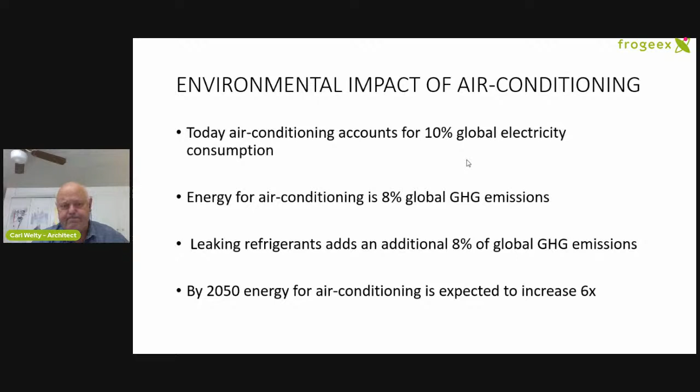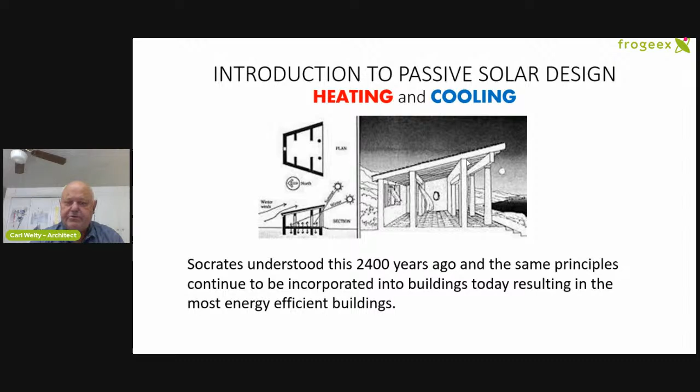Introduction to passive solar. I'm going to do a quick introduction to passive solar, unfortunately little understood, but these principles have been around for a long time—introducing passive solar to both provide heating and cooling. Socrates understood this 2,400 years ago, and the same principles continue to be incorporated into buildings today, resulting in the most energy efficient buildings.

Passive solar, the facts of nature. It's so very simple, but sometimes our culture, we don't do simple very well. The sun rises in the east and sets in the west. The sun is lower in the winter and higher in the summer.

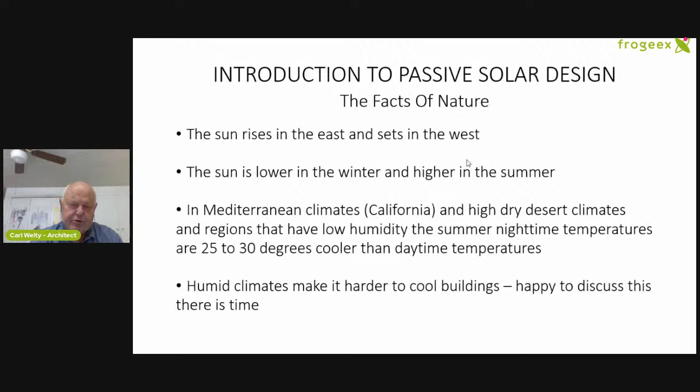In Mediterranean climates like California and high desert climates with low humidity, summer nighttime temperatures are 25 to 30 degrees cooler than daytime temperatures. This is what you can rely on to cool your buildings naturally. In humid climates, it makes it harder to cool buildings. Happy to discuss this another time.

So design principles: orient building to the south. This makes it easier to maximize heat gain in the winter and minimize heat gain in the summer. Use roof overhang or vegetation to shade south-facing glass to minimize summer heat gain. Minimize windows on the east and west-facing walls. Design the building to maximize natural ventilation to cool it at night, and incorporate thermal mass in the building envelope, typically concrete or water bodies.

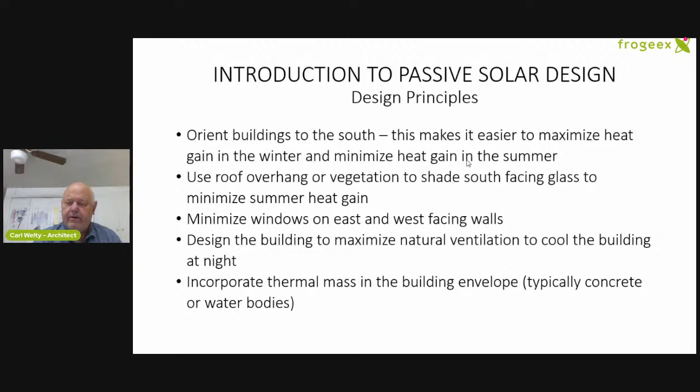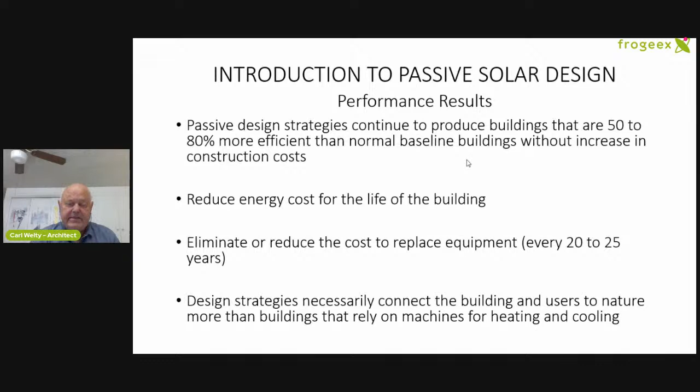Performance results: incorporating these principles continues to produce buildings that are 50 to 80% more efficient than normal baseline buildings, without increasing construction cost. They reduce energy costs for the life of the building, eliminate or reduce the need for cost to replace equipment, and these design strategies connect the building and users to nature more holistically.

I want to discuss a really critical part of this that seems to confuse people. The building envelope requires two parts: there's the insulation that helps keep heat in or out, and thermal mass, often concrete, some sort of substance that absorbs heat and stores it like a battery — a concrete slab or concrete.

Oftentimes people think of thermal mass is the same as insulation, but it's very different and it functions very differently. For example, a concrete wall has very little insulation value. So the California minimal standard for an exterior wall, which is 6 inches wide, would need to be 95 inches thick in concrete to provide the same insulation value.

So concrete's good for thermal mass to store heat, but it does not keep heat inside the building once it's there.

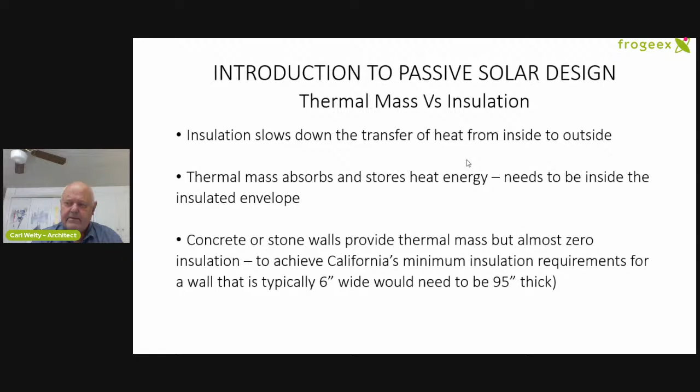So nature-based zero energy air conditioning, summer nighttime passive cooling, relies on the temperature of space being minus 455 degrees Fahrenheit. The space's cold temperature extracts heat from the earth, buildings and air in climates and dry climates.

I know from California that these principles could be incorporated and eliminate the need for air conditioning within 30 to 40 miles of the coast. The same is true for Mediterranean climate and any parts of the globe where nighttime temperatures are cooler than daytime temperatures.

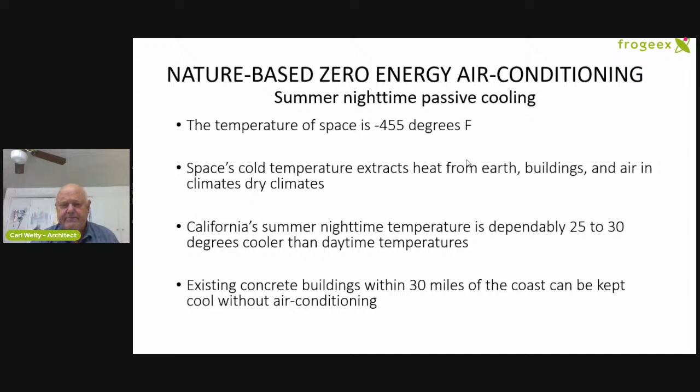Retrofitting existing buildings: incorporating these passive solar principles in existing buildings for cooling is pretty easy because you're not dependent upon solar orientation for cooling. Existing buildings can be retrofitted for passive cooling regardless of the solar orientation.

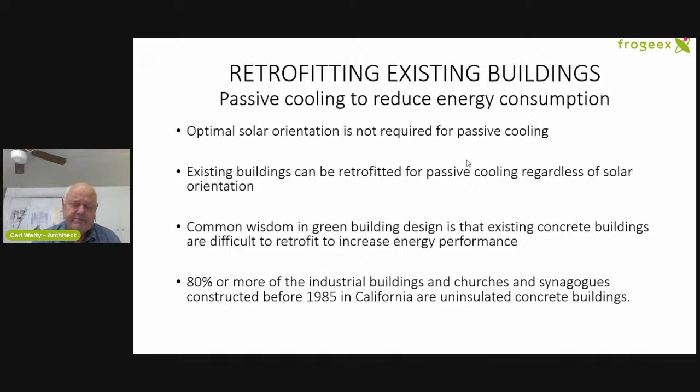I'm motivated by this question, and common wisdom in my green design world in California is that existing concrete buildings are expensive and complicated to make more energy efficient. Also, 80%, most of the buildings built in California before 1985 are uninsulated concrete buildings. So why focus on existing buildings? I like to think that the greenest buildings are the buildings not built. So if we can retrofit existing buildings to be more energy efficient, it's a really net benefit.

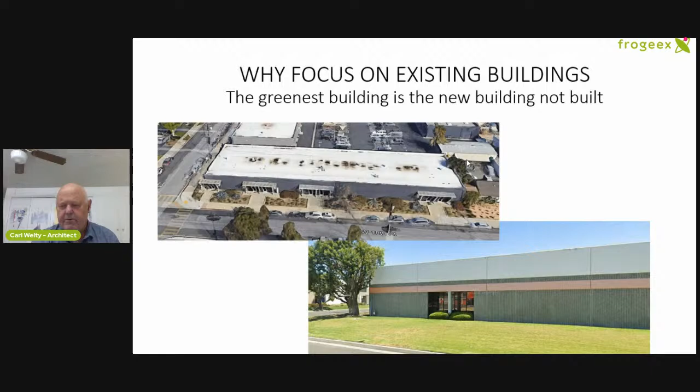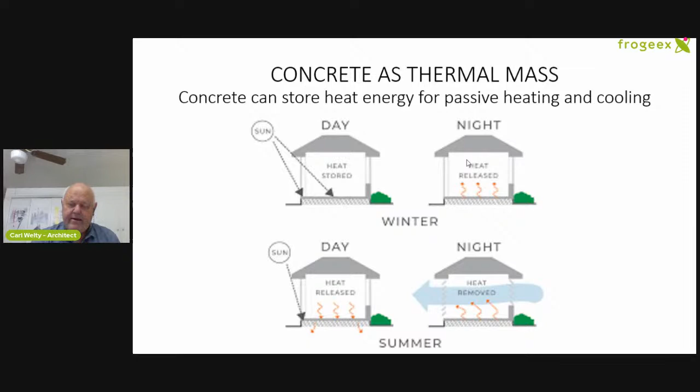So, concrete as thermal mass — I hope this helps understand. Concrete in a passive solar building absorbs heat in the daytime and keeps the space warm at night. And in the summer, the heat is absorbed because it's warm, and it's vacated or radiated out into the night at nighttime.

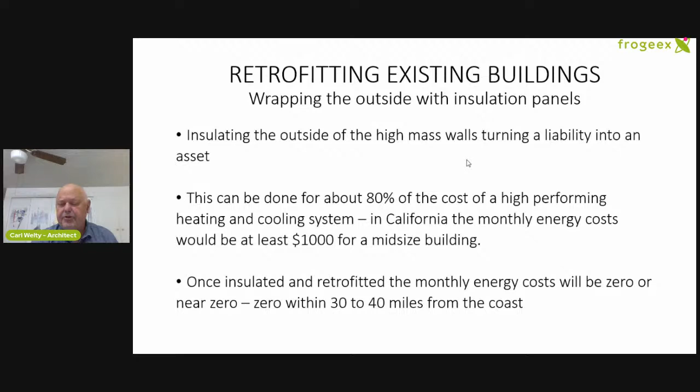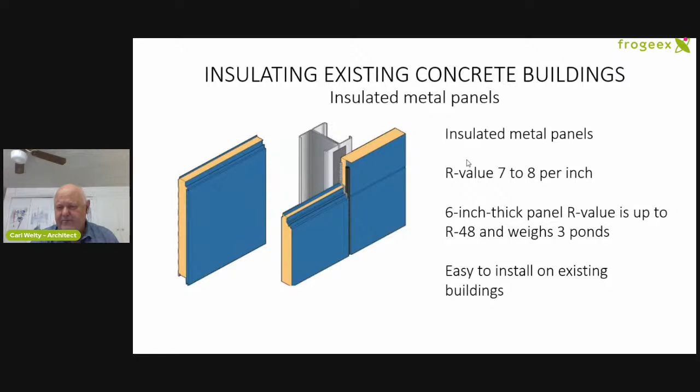We can insulate these concrete buildings with available materials — metal insulated panels, or other easily available building materials. A good R value, we call R value in California, is 7 to 8 per inch. So these can be applied to the outside of walls very easily without increasing the weight and strain on the building.

So these are the toolkits that one needs to retrofit a building.

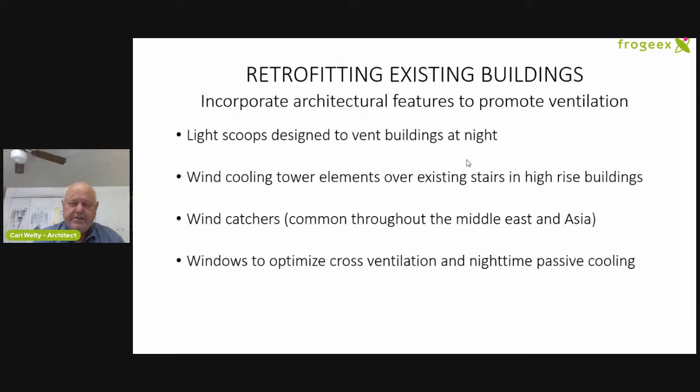Some lessons from ancient history: there's artwork in Egyptian buildings that shows wind catchers and wind ventilation systems that have been around forever.

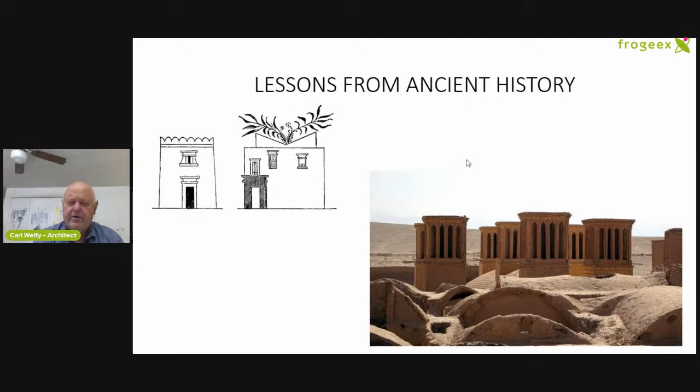One of my favorites are wind cooling towers from ancient Persia. Historically, we know they've been building these for a couple thousand years. The oldest existing towers are 600 to 800 years old and have continued to cool those buildings with no maintenance and no recharging of energy. Wind catchers and big ideas of using wind cooling towers bringing air from the ground.

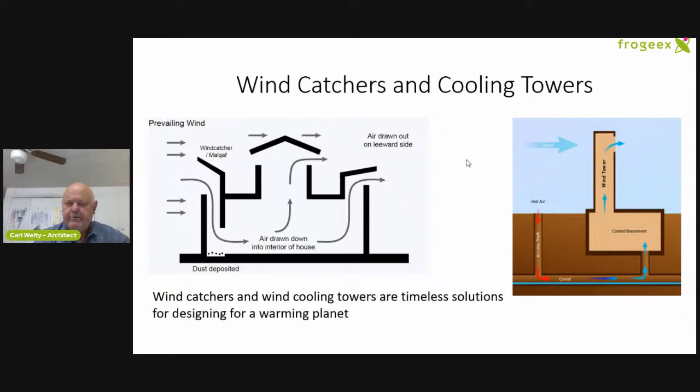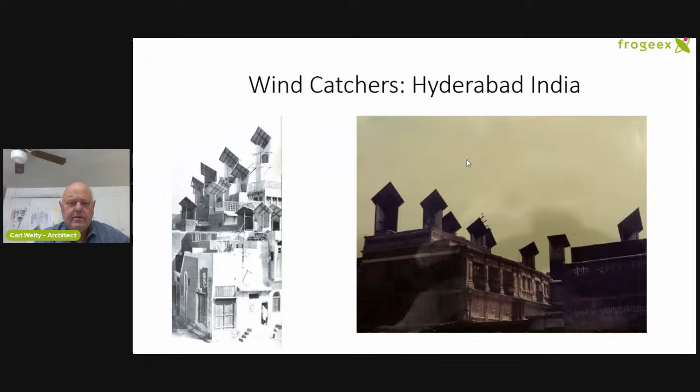I invite anybody who is interested to just Google Persian wind cooling towers. They're very kind of amazing strategies. Wind catchers from Hyderabad, India.

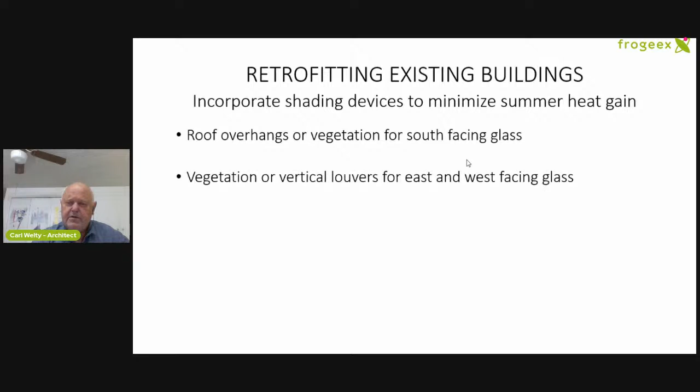Just to rehash: insulate the building, wrap the building with some insulation system, incorporate systems for ventilating the building at night, and incorporate features to reduce summer heat gain, like overhangs or vegetation.

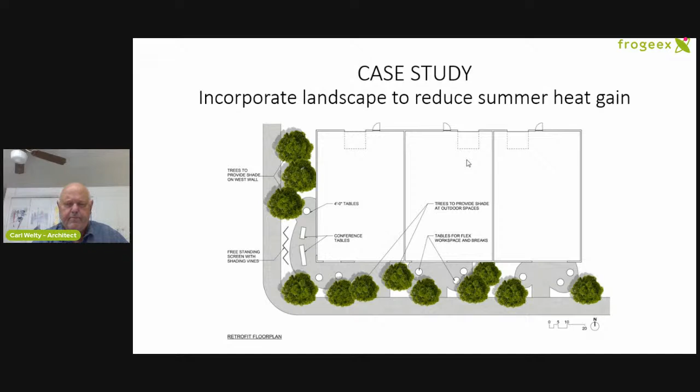To start with, you develop landscape to shade the building from the south and east or west, which gives you an opportunity to create outdoor spaces for employees. The simple building can be wrapped in multicolored metal panels to renew the aesthetics of the building.

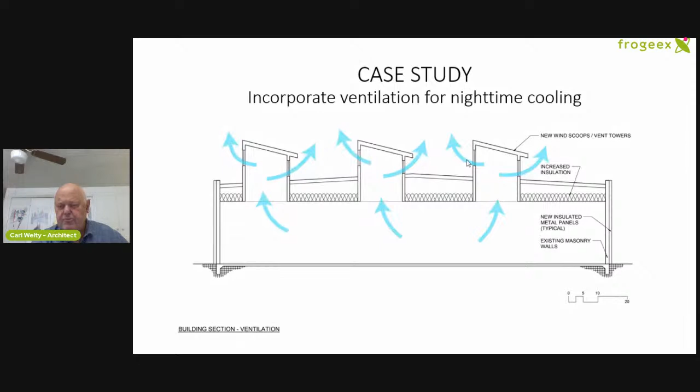Incorporate wind scoops and light scoops on the roof for nighttime cooling. If needed, incorporate shading devices for south-facing sun to keep the summer sun out of the glass and let the winter sun in.

This is easy to do because, as we know, the winter sun is lower in the winter, so a simple roof overhang will shade the glass in summer but let the winter sun in for heating.

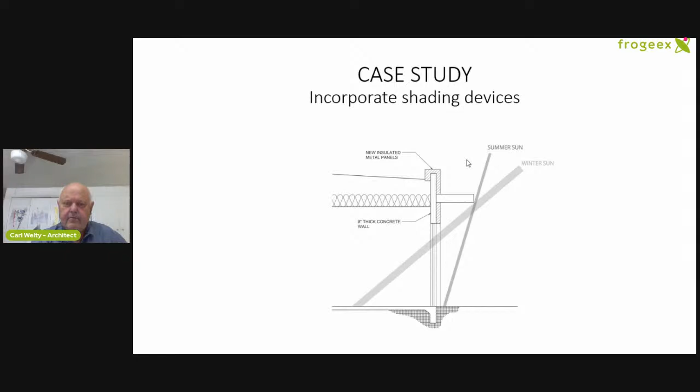Some benefits of retrofitting existing buildings: we can eliminate the need for energy for cooling for the life of the building, with little to zero maintenance or replacement costs. HVAC systems are typically replaced every 20 to 25 years.

So once retrofitted, a building is going to provide thermal comfort for the life of the building—we hope 100 years. Retrofitted buildings will provide thermal comfort during power shortages or rolling brownouts. And retrofitted churches, synagogues, and mosques can become cooling centers during heat waves.

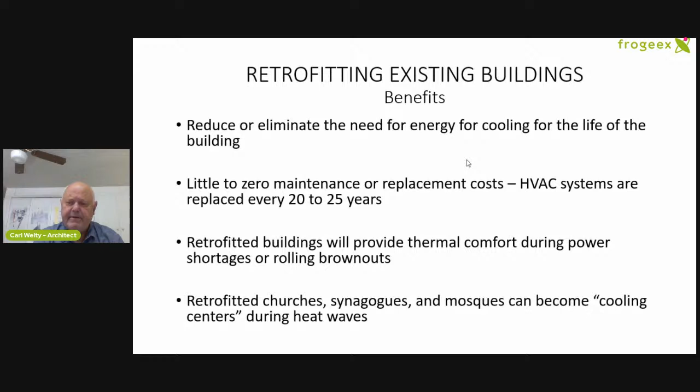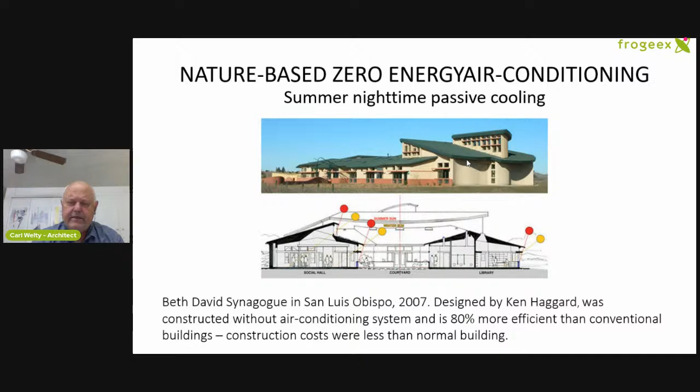So this building, for a very long time, will have no cost to replace the air conditioning system, and there's no refrigerant leakings. So it's clearly a better option than using high technology.

Here's another example. Right before COVID, the synagogue my family belongs to was talking about retrofitting a building built in 1962, typical of buildings from that era—it's uninsulated concrete walls.

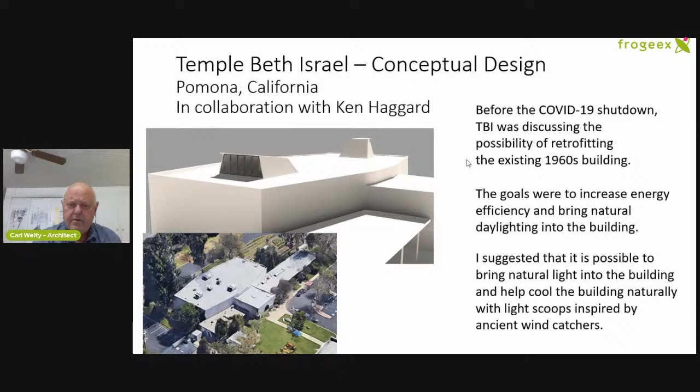So I presented this idea that you insulate the building and then provide scoops on the top to bring in natural light, and also to bring in natural ventilation at night.

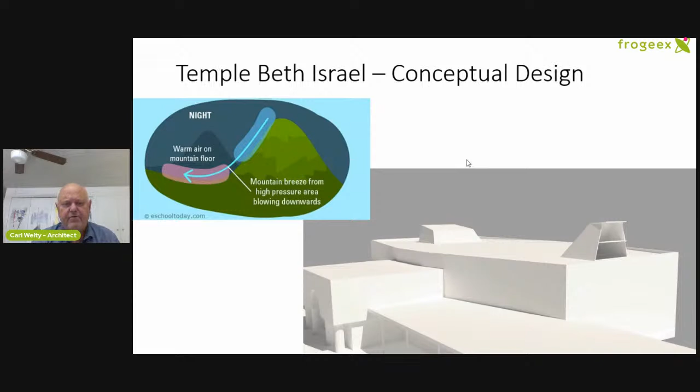This building is close to mountains, so in addition to the cool air at night, you can also take advantage of a cooling breeze that comes down from the mountains. It's kind of a simple diagram.

I presented this idea to the synagogue and claimed that it could probably reduce the energy consumption for summer cooling by 50%.

I ran it by my professor, Ken Haggard, who's clearly a world leader in this sort of strategy. I was right, except that he thinks you could probably reduce the energy by 90%. So this gives me lots of confidence that it is absolutely doable.